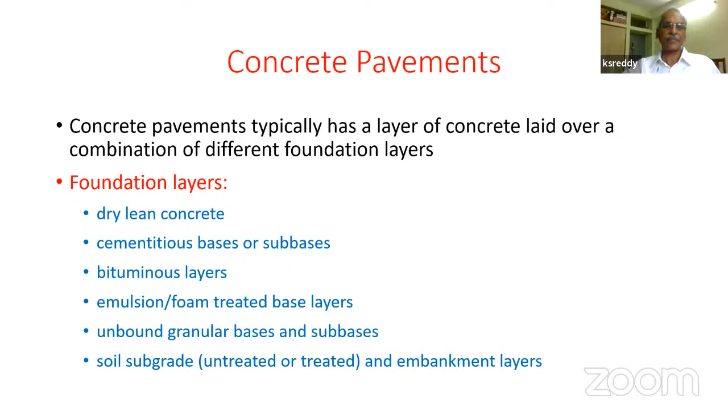You can have various kinds of concrete pavements depending upon how we construct them. This is a continuously reinforced concrete pavement.

I should actually prefer to call it a continuous concrete pavement. There is reinforcement because we are trying to place concrete continuously without joints. So this is theoretically a continuous concrete pavement without joints, though it may have some joints, but by design we don't need to provide them. Since there are no joints, for particular reasons we also provide longitudinal, sometimes transverse reinforcement also. So this is one category of continuously reinforced concrete pavement.

This is a similar pavement, for example roller compacted concrete pavement, where we may not have joints by design. We can place the concrete continuously. Afterwards, you may or may not cut joints.

This is our conventional concrete pavement, jointed plain concrete pavement, which we normally use on our national highways, 4.5 by 3.5 slab, transverse joint spacing at 4.5 meter spacing. Then longitudinal joint, every lane is separated by a longitudinal joint. So typically a slab size is 4.5 by 3.5. You can have pavements with smaller slab sizes, smaller panel sizes. Obviously for that you need to cut the grooves at closer intervals.

This is the smallest size of concrete panel. This is also concrete pavement, you can consider that. If this is concrete and if these are blocks, you can consider this to be concrete pavement.

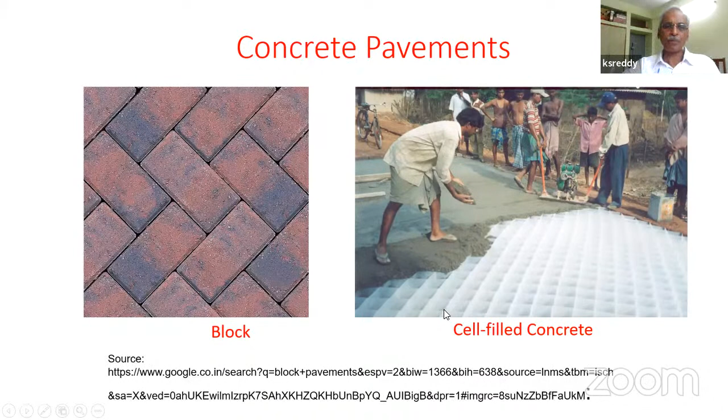So you have different types of concrete pavements, starting from block pavements, precast, cast in situ block pavements, and typical conventional highway concrete pavement, smaller panels, and continuous concrete. You also have what is called white topping, concrete over asphalt layer, bituminous layer, and among white topping, the concrete layer being thin or thick, different kinds of names that we use depending on the thickness of the concrete layer. And you can also have black topping over white topping, bituminous layer over concrete layer.

We also have the total thickness of concrete placed in 2 layers, wet on wet, and then maybe you can use inferior grade of concrete at the bottom layer, and the upper layer could be the functionally required layer with better quality aggregates.

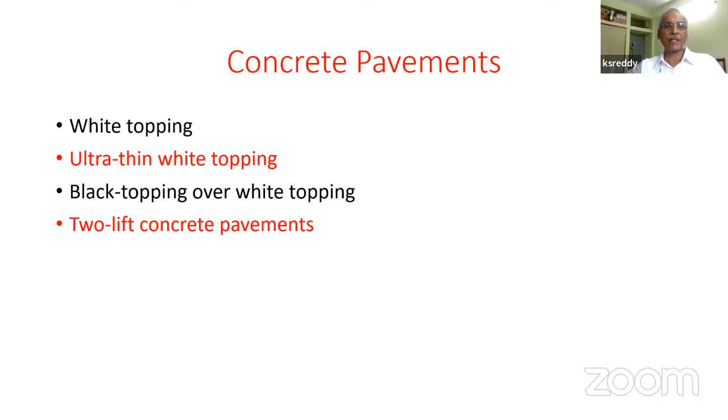So in all this, what defines the kind of concrete pavement is the size of the panel and how we create it. For example, consider this the smallest size of concrete pavement in terms of panel size, which is precast blocks or precast panels. You can prepare them elsewhere and then bring them to the site and then place them and construct a block layer. You can also do the same thing with a panel layer.

So what happens is we also used to have a construction where we construct concrete pavement panel by panel, so there is no interlocking between these adjacent panels. If that were to be the case, for example you've got 3 panels constructed independently, one after another, if you place a load here, then these 2 would not share the load. That same thing is depicted here. There is a middle panel, I'm placing a load here. These 2 panels would not be able to share the load because there is no load transfer mechanism between these 2. This is one kind of concrete pavement.

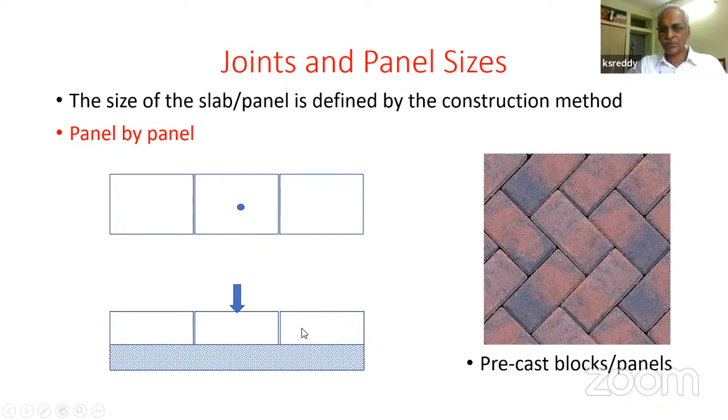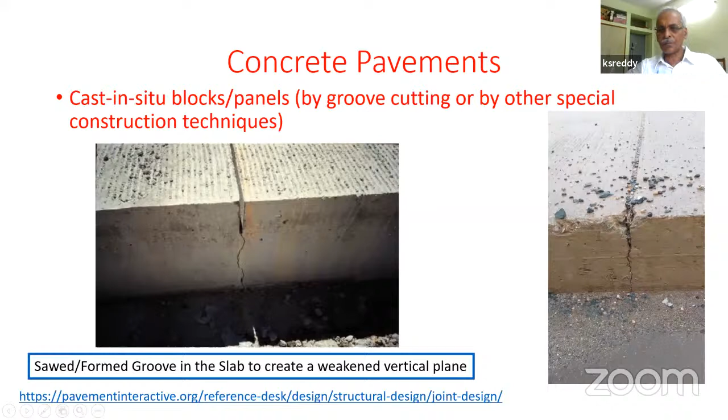On the other hand, we create those joints by pouring concrete and then cutting grooves here. For example, this is a transverse groove that we cut up to 1/3 depth of the slab, and we expect a crack to form below the groove. So once you have a groove, this panel is separated from the adjacent panel. A groove and the crack formation below that ensure that you have a panel of the size you created, maybe 4.5 by 4.5, 4.5 by 3.5, whatever is the joint spacing you consider, transverse and longitudinal. So this is a common form of joint creation that we do on national highways. But let us see the implication of this. And this is also a joint,

a kind of concrete pavement that I just discussed, which is cell-filled concrete pavement. So you've got these plastic shells, we are pouring concrete into that. So this is what we expect: the plastic wall is expected to bend when you pour concrete and roll it or vibrate it. So as it bends, these 2 adjacent blocks are interlocked because of the irregular shape.

If you can see those blocks which are taken out from a cell-filled concrete pavement, you can see the irregular nature of the vertical faces of these blocks. That creates interlocking between adjacent blocks. So this is a cast in situ interlocked concrete block. This is similar to your interlock concrete block pavements, but those are normally precast. This is cast in situ.

So if you place a load on any one of those blocks, you can expect that the blocks around that will share the load. But if this doesn't happen, you do not have a load transfer happening. Each block will be transferring the load to the underlying layer by itself.

So the interlocking mechanism at the joints, the type of joints that we create is very critical in defining what is the size of the panel and over what area there is load transfer occurring.

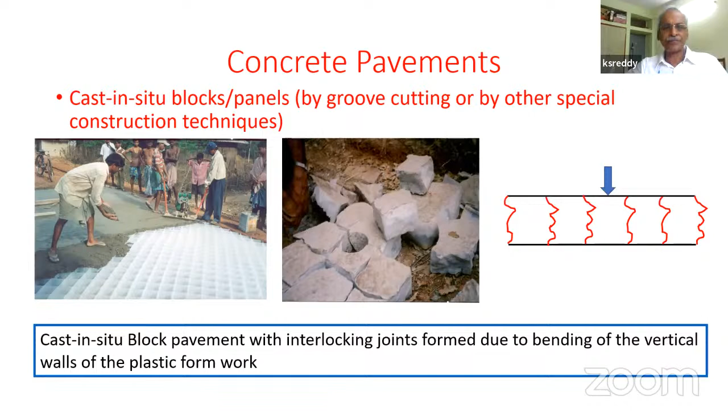For example, if you do not provide any joints and pour concrete over a very wide area, say maybe 5 kilometers together, a very wide pavement slab, what would happen is it would crack. Because as the slab tries to contract due to reduction in temperature in winter, if it is restrained, there will be thermal stresses and it is going to crack.

So if you take an element and increase its temperature by delta T, if you know its elastic modulus value and coefficient of thermal expansion, you know this is the thermal strain, and this multiplied by the modulus value gives the thermal stress. If you're trying to prevent the element from expanding, there is a compressive thermal stress, all of you know that.

Similarly, if it is trying to contract but we do not allow the member to contract, then there is going to be thermal tensile stress. For a simple element, you can calculate the thermal tensile stress as modulus value, coefficient of thermal expansion, into drop in temperature. What is drop in temperature? We'll discuss. So if this exceeds the tensile strength of the material, you can expect a crack, tensile crack.

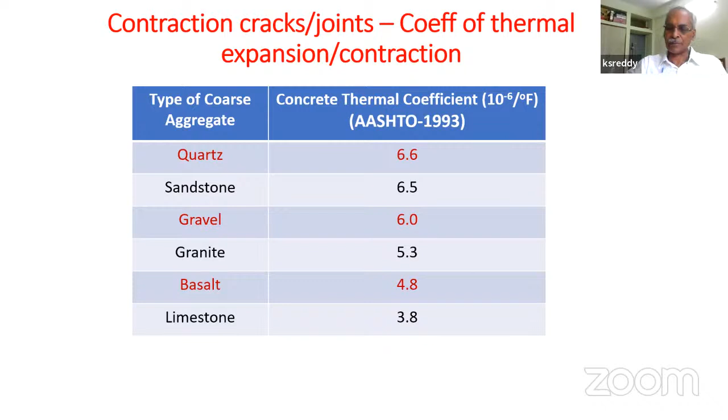The restraint to concrete contraction is mainly produced by the interface between the concrete slab and the foundation, the friction that is mobilized between these two layers under different conditions. I'm presenting some results produced by one of my former PhD students, who is a faculty colleague at IIT Kharagpur, Dr. Swati Maitra. She did experiments on different types of concrete slabs placed on different types of foundations with and without a plastic sheet.

We know that on most of our national highways, below the concrete slab, we put a plastic sheet. We also have construction where we eliminate the plastic sheet and place the concrete directly on dry-lean concrete. So these are the results that we get.

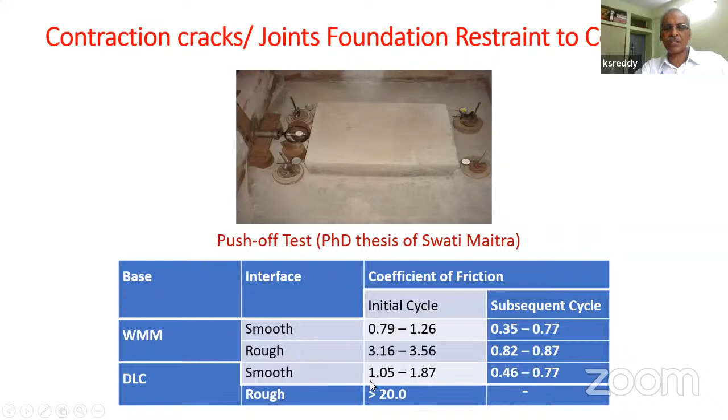And over DLC with a rough interface without a plastic sheet, we could not actually measure it, because the screw jacks were not adequate to push the slab, as the friction was as large as 20.

Now there is a critical issue here. When you cut grooves and expect that a joint is formed, creating a panel of a certain size, this is called joint activation. You cut a groove, typically to 1/4 to 1/3 depth of the slab. You weaken the slab there, and when it tries to contract or shrink, you expect a crack to form there. For example, no crack forms here, no crack formed here, and maybe all these other joints crack.

We have maybe a 4.5 meter long slab here, 4.5, 4.5 -- this is a 9 meter slab. So those of you who had the opportunity to examine failed concrete pavements, if you notice whether a crack has formed below these grooves, you would find in many cases there was no crack below the groove.

That may be because the joint spacing you considered, 4.5 meters, is too small -- because you are putting a plastic sheet there, or the aggregate you're using may have a small coefficient of thermal expansion. So the expected thermal stress, which would crack the slab at 4.5 meter spacing, is not getting mobilized. It can only crack the slab at 9 meter spacing. So if that were the case, what you are actually creating is a 9 meter long slab.

Similarly, if the longitudinal joint doesn't crack, you might actually create a 9 meter by even 7 meter slab, or even wider, maybe 10 meters. So in many cases, what we're doing is creating panels of sizes much larger than what we thought we were creating. What we thought we created was a 3.5 by 4.5 meter slab, but what we're actually creating, because no crack forms below the groove -- meaning activation is not happening -- is larger slab sizes.

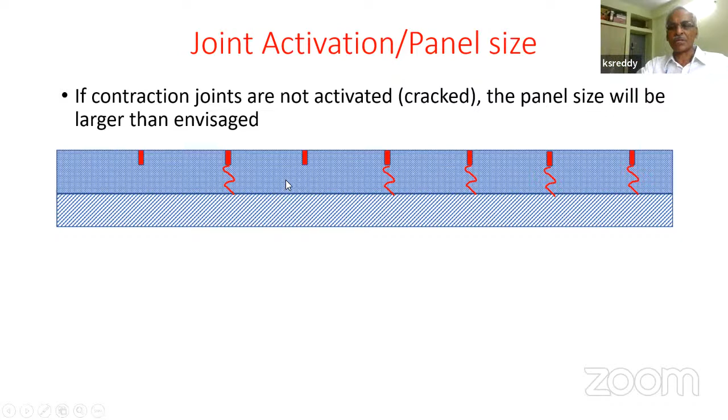That will have an impact on where the cracks will form in the transverse and longitudinal direction, and what is the size of the slab undergoing curling.

Many of you know what curling is. If there is a temperature differential between top and bottom, the slab would either curl this way or curl this way. This would be a typical daytime case, and this would be a typical nighttime case.

But full curling is not permitted because of the self weight. This will pull it down. Similarly, the self weight will pull it down elsewhere. It would not remain completely flat. Some amount of curling will happen in the slab, but not complete curling.

So since there is a restraint to curling, we are not allowing full curling to happen because of the self weight, or because it may be bonded to the layer below. How much resistance the foundation can offer to the lifting of the slab is difficult to estimate. But let us assume, because of self-weight, the slab is trying to be brought back, and full curling is not allowed. So we assume full curling is prevented, and we calculate the curling stress, the corresponding flexural temperature stress.

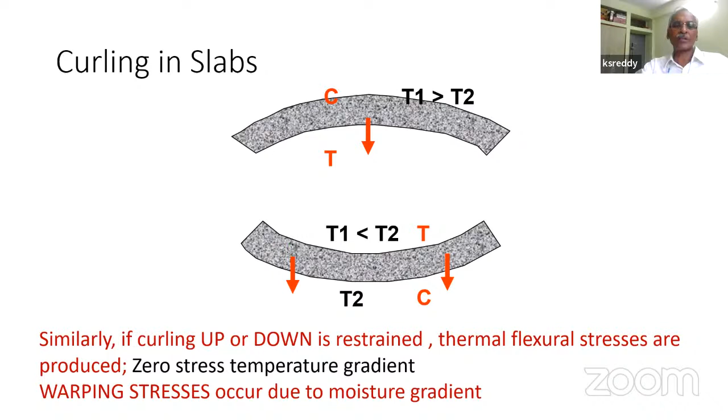A similar phenomenon occurs when there is a moisture gradient. If you have hotter conditions here, you have smaller levels of moisture, and this would have more moisture. So the moisture gradient will be in the opposite direction to the top temperature gradient. One can estimate the stress produced by the moisture gradient the same way as you estimate the temperature curling stress.

See whether the slabs actually curl or not, and how much of the slab curling is actually restrained by the self-weight of the slab. We were making some experiments on National Highway 60, at the Kharagpur Palasur bypass road.

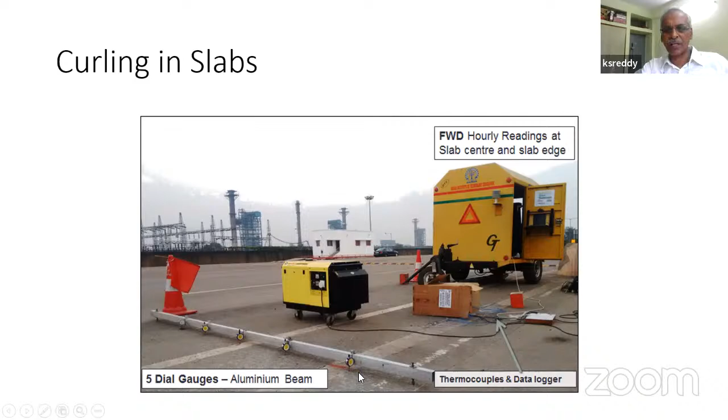We put dial gauges here. We have a frame which was measuring the vertical profile of the slab. We were also trying to measure the temperatures of the slab at different depths to get the temperature profile, the temperature gradient, and simultaneously we were measuring the temperature profile and the lifting up and down of the slab.

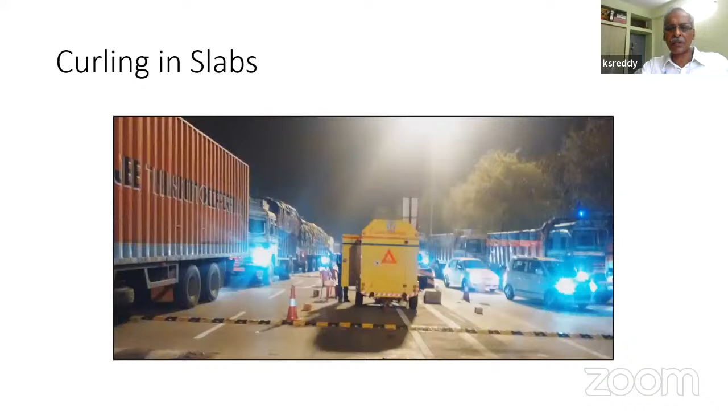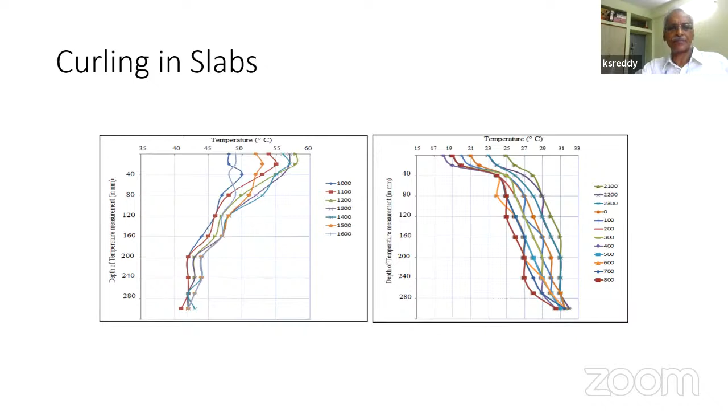So curling happens, but part of this is restrained. This is what happens after the total curling is restrained, partly because of the self-weight and the connections with the adjacent slab and connection to the foundation.

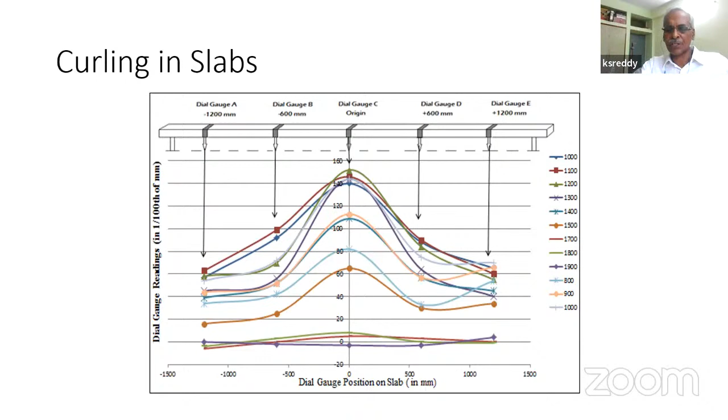So when you compare a large slab to a small block, the block pavement to the continuous concrete pavement, these are the things that are going to be different. The panel size is going to be different. What would be the panel size is a function of how many joints are activated - do you have 4.5 by 3.5 or 9 meter by 7 meter slab? This is a critical issue which will govern where the cracks would form, what stresses will be produced. Typically the thicknesses of large panels will be larger. As you reduce the panel size, you can construct concrete pavements with smaller thicknesses.

Another very critical thing is what is the load transfer mechanism from one panel to the adjacent panel? Because when you place load on a pavement, it should distribute load over a much wider area, whether it is a block pavement or a large panel concrete pavement - we expect the adjacent panel to share load. But we have seen in some construction where you construct the concrete panel layer by panel, there is no load transfer mechanism, whereas when you create an interlocking mechanism, there is definitely a load transfer mechanism. So creation of load transfer mechanism across these panels is very critical for the performance of these pavements.

In some cases there may be no load transfer because the blocks have no physical connection. There could be aggregate interlocking, or we might put dowel bars connecting adjacent blocks or adjacent panels to transfer loads.

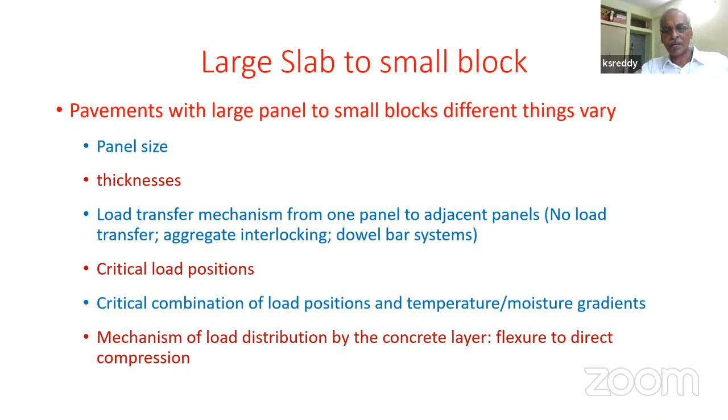Maybe compressive stresses, crushing stress would be more critical there. And in the case of large panels, flexural stress is going to be more critical. So when you consider large panel to small panel concrete pavements, or even continuous concrete pavements, this is the framework within which we are going to examine all these types of concrete pavements.

What is the definition of performance? What are important material characteristics that are relevant if it is a large panel concrete and if it is a small panel concrete or block pavement? Which property of concrete is more relevant? And what are the important loading considerations that we need to take into consideration? And what are climatic considerations? We'll quickly go through this.

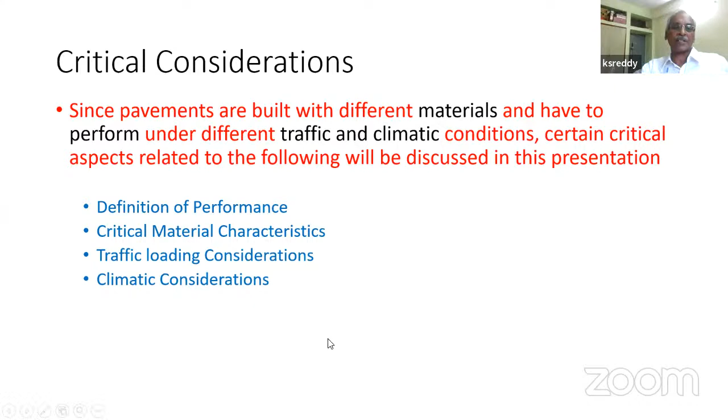We all have studied about functional performance, structural performance, so I'll not go into those details, but we understand for any kind of concrete pavement or any pavement, functional performance is about comfort and then safety, and of course economy. So safety is about having a surface profile which has got adequate skid resistance, friction, so that vehicles can come to a safe stop. On the other hand, comfort is about how the surface profile varies over its length and width.

Okay, so you can quantify that in terms of some roughness index, that is your comfort. So what contributes to roughness or what contributes to comfort, that we need to understand. And skid resistance is primarily an issue related to our construction practice and our material selection. On the other hand, we need to maintain the concrete layer in an adequate structural condition so that it would not adversely affect the functional performance.

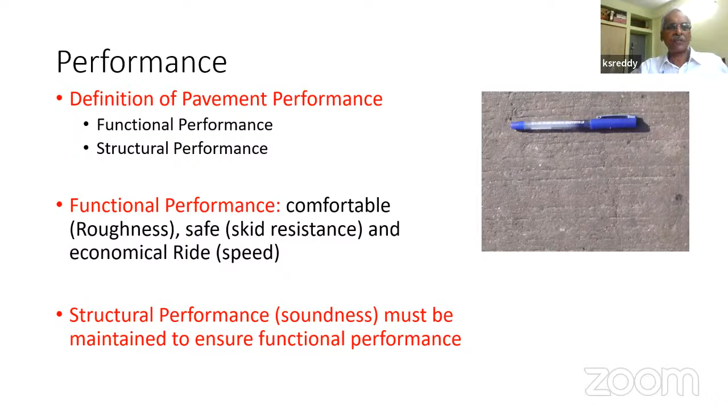We know in terms of roughness or comfort, rougher pavements are less comfortable, and smoother pavements are more comfortable. Smoothness is not about having a very smooth planar surface, it is about less variation in the surface profile. So the variations in the surface profile produce vibrations in the vehicles, produce movements in the body of the passengers or drivers who sit in the vehicle, various kinds of vibrations.

There are certain critical vibrations, accelerations, velocities. One can correlate that to the comfort level and even injury of the people sitting inside the vehicle. So people have been able to correlate the surface profile to comfort level. And you got cracks, you got joints problems, and if there is plastic deformation and so on, they will also contribute to discomfort. This is about what causes comfort, discomfort.

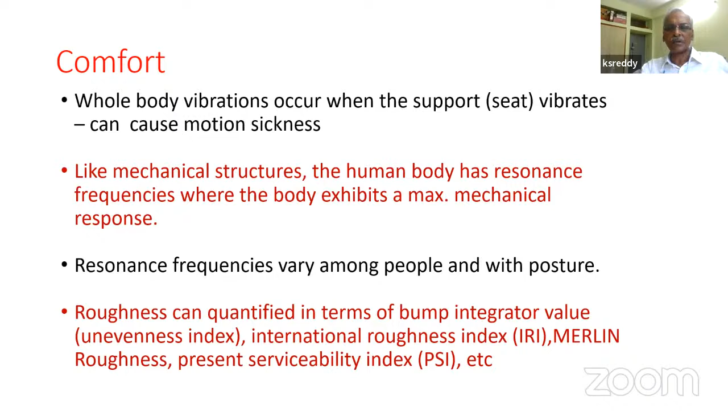And we typically measure roughness or comfort using various kinds of equipment. Fifth wheel bump integrator, or in terms of international roughness index, or we use other equipment such as Merlin machine, or we express that in terms of what is called present serviceability index. There are various ways of expressing the roughness which is related to the comfort.

So every kind of a structure, every facility, you need to expect some performance from that. So you have to define what are we expecting from our roads. Unfortunately, the only performance indicator that we have documented in our documents in India is in terms of the roughness, measured using a fifth wheel bump integrator or by other similar equipment which express roughness of the road.

The current guidelines that we have for concrete pavements given by IRC Special Publication 16/2019 state the roughness, called unevenness index, as measured by fifth wheel bump integrator, should be less than 2000 millimeter per kilometer for good roads, 2000 to 2400 for fair roads, and more than 2400 for poor roads, for expressways, national highways, and state highways category. For other categories of roads, including village roads, good road is less than 2200, fair road 2200 to 2600, and poor road more than 2600 millimeter per kilometer.

But when we design, it would be very difficult for us to control the kind of roughness that we expect during its service life period. There is hardly any design parameter which we can vary or control so that the roughness can be controlled. What we can control is to ensure that it doesn't crack, it doesn't undergo plastic deformation, the foundation is not eroded. These are things that we can control through the design process - increase the thickness, make the foundation stiffer, maybe control the size of the slab. These are our design variables.

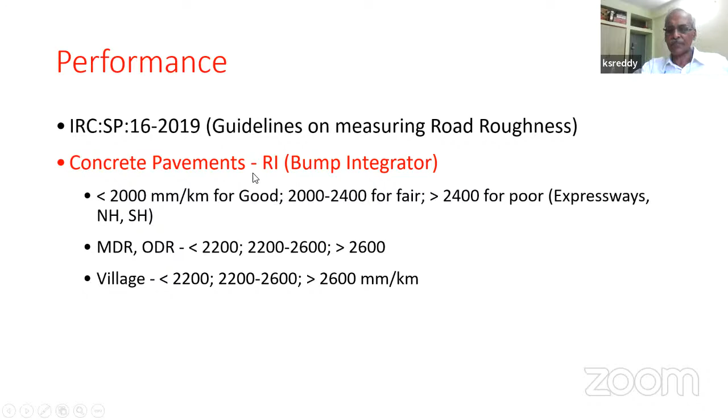So thereby we can control the stresses, deflections, in the layers of the pavement. But can we control the roughness of the road surface, how the profile is going to vary directly through our design process? Very difficult. But our guidelines for performance indication in India are currently in terms of the roughness or unevenness index value.

Compared to this, if you look at the mechanistic empirical pavement design guide for jointed pavements as well as continuously reinforced concrete pavement, let us look at jointed pavement because this is what we normally build in India.

There is a joint faulting, which is a problem with concrete pavements. At the joint, both slabs are at different elevations. So the average joint faulting should not be greater than a certain value. For interstate highways, there is a criteria for that. As for load transfer efficiency, theoretically there is no criteria, but we expect a certain level of load transfer efficiency.

The amount of transverse cracking, the percentage of slabs having a certain degree of transverse cracking, should not be in excess of 10%. This is a performance indication in terms of physical problems you see there. There is a performance indicator in terms of joint spalling, and also one in terms of roughness. If you can estimate all these, they go as input parameters for estimation of roughness, so you can control the roughness directly in terms of these parameters.

Similarly, if it is continuously reinforced concrete, you have got similar parameters. What I'm trying to say is the mechanistic empirical pavement design guide, MEPDG, talks in terms of cracks, foundation erosion, the spalling that occurs near the joints, and the joint faulting that occurs near the joint. It talks in terms of those physical problems which you can see, measure and quantify, and it sets limits on those.

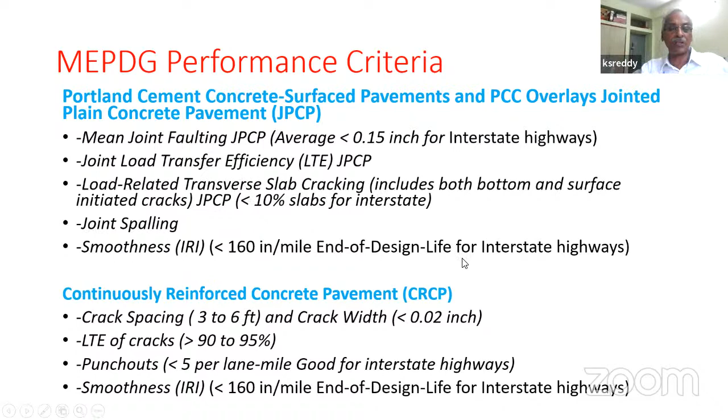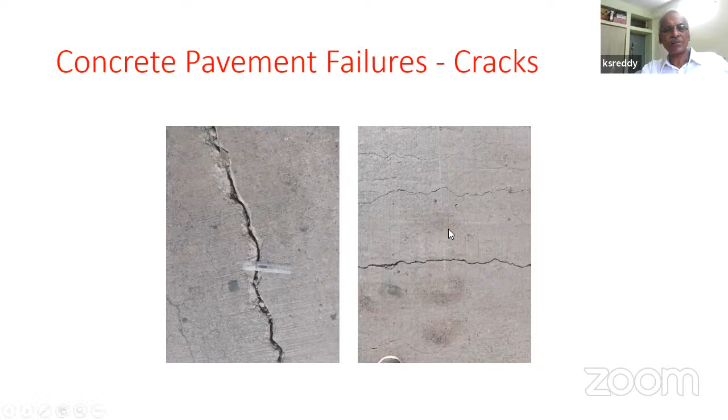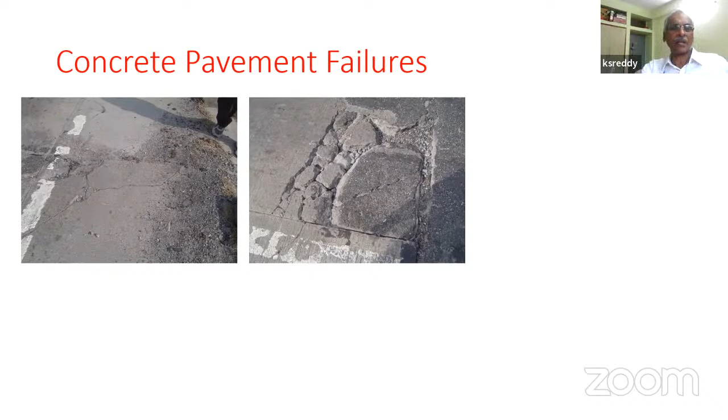Both slabs are at different elevation. So there are various types of cracks that form because of various reasons. And once you have cracks, you have other disintegration of the slab occurring near the corner locations and mostly near the joint locations, and at edges of cracks, you have slab disintegration happening.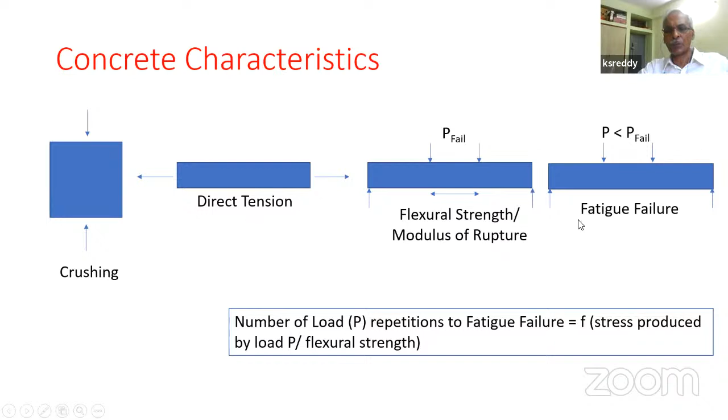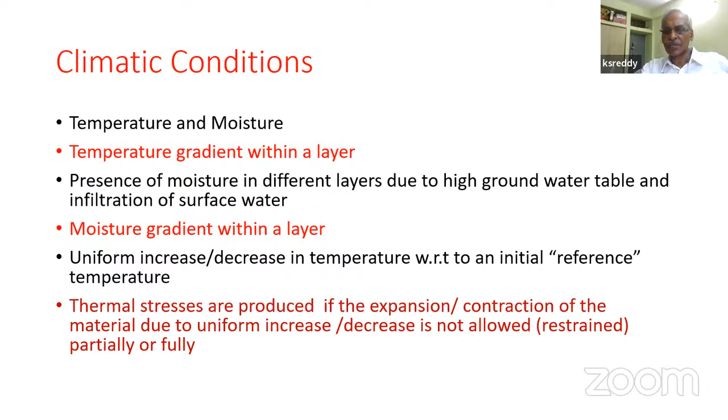When you consider climatic conditions, these are different issues: variation in temperature, temperature gradients, and then the maximum temperature, minimum temperature to which the layer is going to be subjected, the temperature when the slab initially is set and then gains strength. Was there any temperature gradient when the initial setting happened? These are the issues that we need to consider in our design.

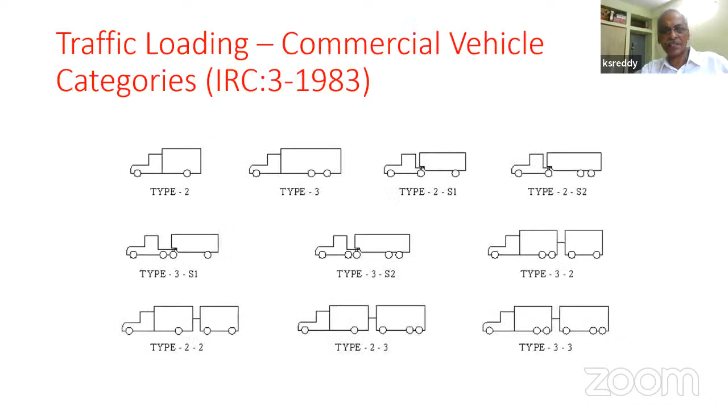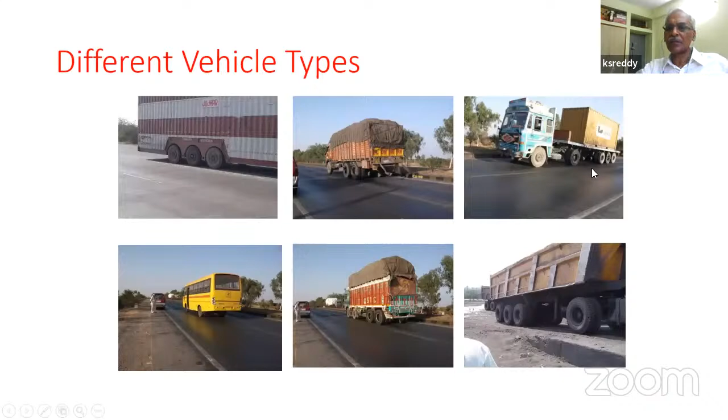We have various kinds of loading - the concrete pavement is subject to different kinds of vehicles as defined by IRC 3, 1983. Various kinds of axles - tridem axles, single axle, dual wheel, single wheel, all axle configurations are there. These are different axle configurations for which these are the legal loads prescribed by the Ministry of Road Transport Circular: single axle single wheel, single axle 2 wheels, tridem axle 12 wheels, and so on. This is the maximum permissible limit.

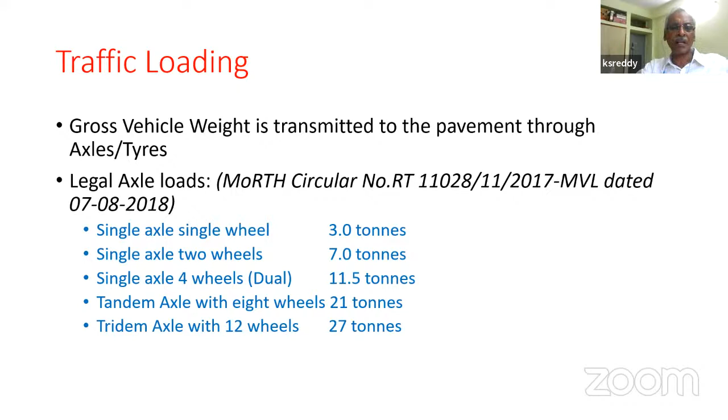What I'm more interested in, rather than the legally permissible load limit, is the axle configuration. This is the wheel load configuration for a single axle, single wheel on either end, and then single axle with dual wheel at either end, tandem, tridem with 2 wheels on each axle. These are tandem and tridem with a single wheel at either end. You might have seen axles of this configuration also.

So when you consider different panel sizes - whether we should put one axle or two axles - only one set of dual wheels is going to be critical. This is what I was discussing when the slab size varies from a very large panel to a small panel block. So the number of wheels that you can accommodate and the kind of failure it would produce - transverse cracking, longitudinal cracking, top-down cracking, bottom-up cracking - the load positions are going to be critical.

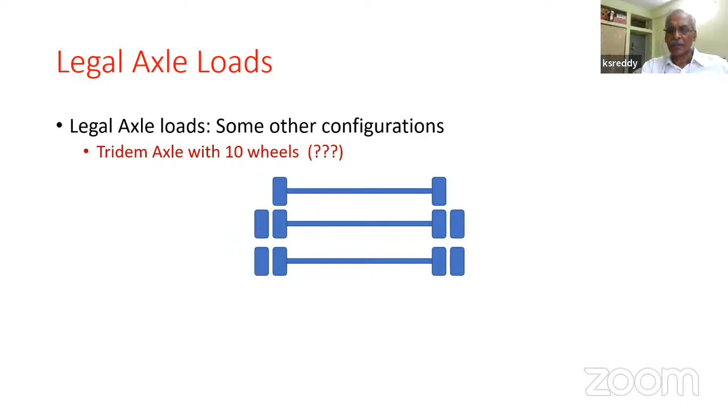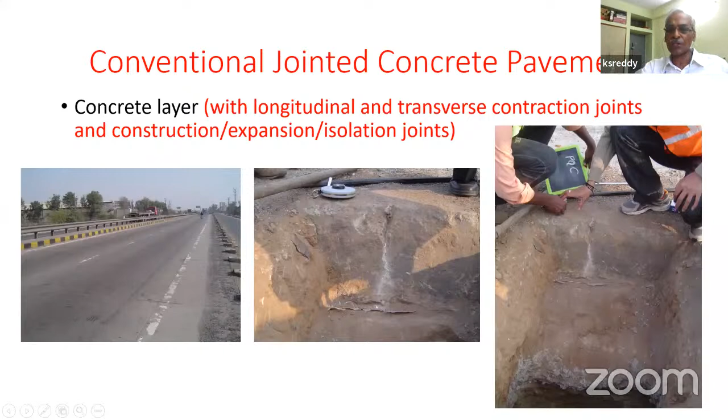As per Indian Roads Congress guidelines, I'm quickly going to discuss 3 different kinds of pavements. The conventional jointed concrete pavement as per IRC 58 - I'll summarize the design features, not going into too many details. We typically go for 4.5 meter transverse joint spacing, and every lane we try to separate with a longitudinal joint - so 3.5 meter longitudinal spacing, 4.5 meter transverse joint spacing.

So typically we are creating 4.5 by 3.5 meter panel sizes, assuming there is activation of the joint at every groove that you cut. We have dry lean concrete plus granular layers as the foundation layers placed over the prepared subgrade. And we check the slab for cracks that initiate from the bottom, and top-down cracks, bottom-up cracks. In the transverse direction - the longitudinal direction occurrence possibility is less severe than transverse cracking. The combination of loads that can produce bottom-up cracking with positive temperature differential, similar to the combination of loads and temperature differential that produce top-down cracking, have been identified in IRC 58.

The number of loads that can be combined with maximum positive temperature differential, and the number of loads that can be combined with maximum negative temperature differential, have also been identified. We calculate the total cumulative fatigue damage caused by all those traffic loads during the design period of 25-30 years, and then assume that if the total damage doesn't exceed 100% or 1, the slab is going to be okay.

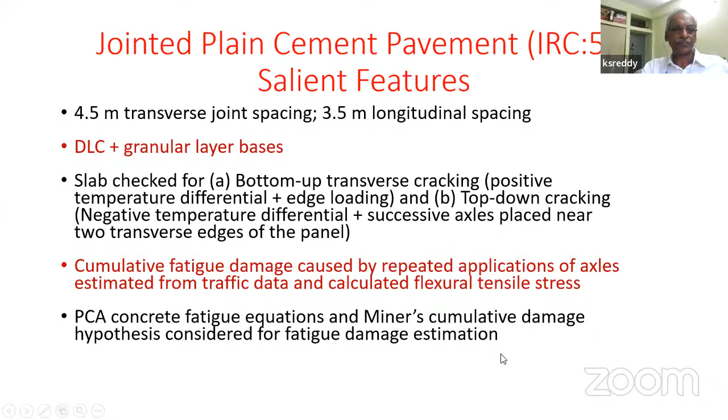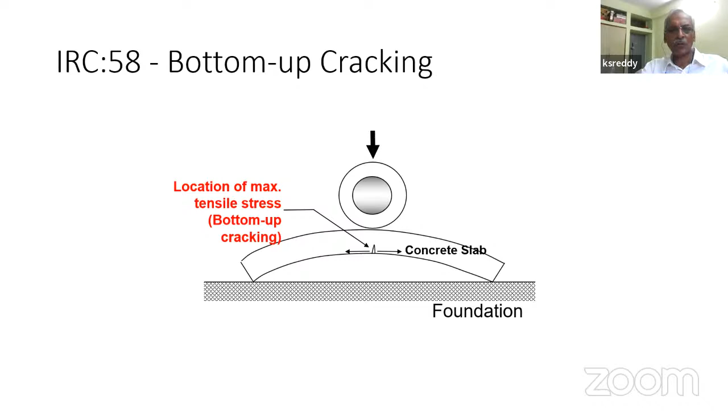So these are the two types of problems that we consider. Daytime, when the slab is trying to curve like this, and when you place a load like this, it can produce a bottom-up crack, which will progress upwards, called bottom-up cracking. Find out how many loads are relevant for producing this kind of failure. During daytime, how many axles would be placed in the middle of the slab, count them, and find out the cumulative damage caused by all that number.

Typically, if it is a transverse cracking case, single axle you place in the middle, tandem axle, this would be the load position. You subject this to positive temperature gradient so that it will have the tendency of curling as shown here, and the combined action of load plus temperature differential would produce bottom crack.

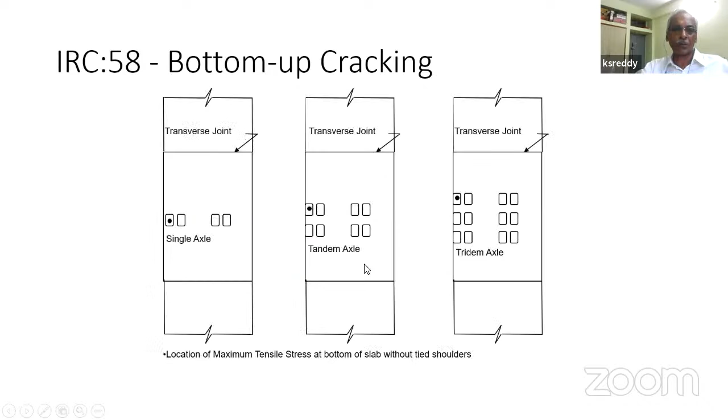Similarly, during night time, there would be certain category of vehicles which would have spacing between the front axles less than the length of the slab, which is the transverse joint spacing. So you count those number of vehicles, and those would be in combination with negative temperature gradient, during which the slab will have this tendency, producing a top-down crack here.

So count all those numbers plus the negative temperature gradient, calculate the fatigue damage caused by all those vehicles whose spacing between successive vehicles is less than the transverse joint spacing, and then estimate the cumulative damage. That is relevant for top-down cracking.

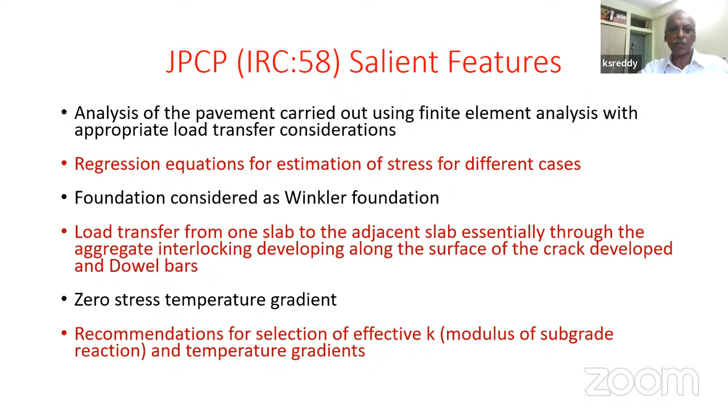So these are the salient features. The analysis is carried out using finite element analysis. Foundation is considered as Winkler foundation, bed of springs, and there are concepts called zero stress temperature gradient, load transfer from one slab to another slab, and load transfer from main slab to a paved shoulder. These are the salient features of jointed concrete pavement as per IRC 58.

I'll quickly introduce a new type of concrete pavement. I think I'll just take another 10 minutes for this talk.

As I already shown you, this is a continuous concrete pavement where we place concrete continuously. We may have some joint somewhere. If it is a construction joint, of course, you need to have a joint there. Sometimes we may have an isolation joint or expansion joint. But let us assume theoretically we place concrete continuously. As a result, we may have cracks forming there, and you may place reinforcement like this in the longitudinal direction.

So these are the cracks in the side view that you see at irregular spacing, but more or less at regular spacing you can see them. Sometimes they could be random also. So you have cracks, and there is a reinforcement running through this. Hence, it is a continuously reinforced concrete pavement.

So how are these different from your jointed concrete pavement? You should assume that this is your panel, which is created. This is separated from the adjacent panel like this because there is a full depth crack. So when you place a load on this, it should transfer load to the adjacent slab. That is the meaning of a layer. Otherwise, each block is working independently, so there has to be some load transfer mechanism across this.

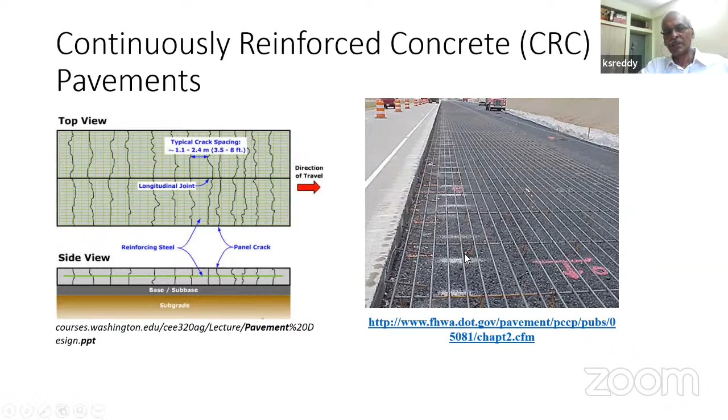As you can see, these cracks are irregular in shape, so there is an interlocking that is happening between these two. The function of reinforcement is to ensure that the cracks do not open up. The interlocking is maintained, so the reinforcement is designed in such a way that the crack spacing is controlled, crack opening is controlled, cracks do not open up too wide during winter. So that is the purpose of reinforcement here.

Yeah, same thing is explained. This is the plan view, this is side view. In the plan view, if you do not have any joints, you can expect cracks to be forming at some regular irregular intervals. If the slab is too wide, you can also expect longitudinal cracks to be forming.

So these, if these cracks are full width, this is one panel, this is another panel, you can consider this to be a different panel. So the load transfer from one panel to another one, as I just explained, will happen through this interlocking. This slab is interlocked with the adjacent slab through this interlocking mechanism. We do not want this to be opening up too wide, otherwise the interlocking mechanism will get reduced, and load transfer to the adjacent slab is going to be reduced.

The purpose of reinforcement, as I just mentioned, is to keep these slabs, the cracks tight together. They will not allow them to open up too wide, and maintain the interlocking adequately throughout the service life period.

The principle of continuously reinforced concrete is that we know there is going to be cracking, so it is based on letting it crack. People should accept that this is a pavement which is going to have cracks. When you cut grooves, they're in a regular fashion, so people accept that, but this surface will have irregular cracks, so one has to accept that.

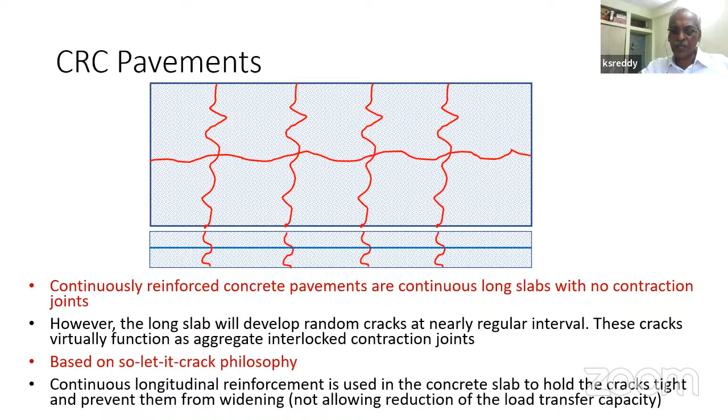We provide continuous reinforcement to ensure that adequate load transfer is continuously maintained, so the cracks do not open. What is the design philosophy here? We have reinforcement, you've got the slab, and you expect cracks to form, and they may be of different width and different spacing.

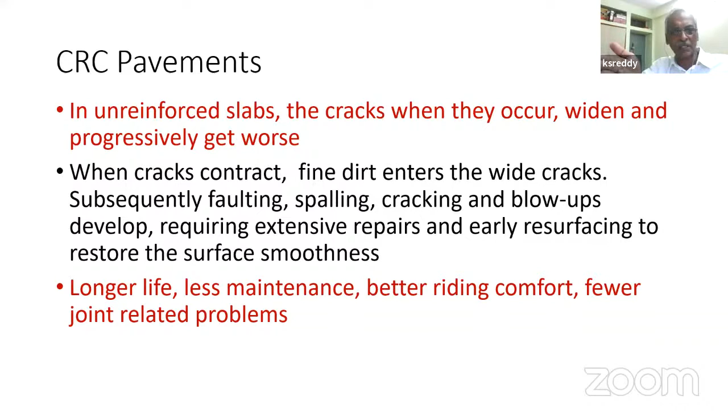So what we design these slabs to ensure is that the slab spacing is controlled and slab width is controlled. The joint spacing, the crack spacing is controlled, and the crack opening is controlled. We don't want it opening up too large. We don't want the crack spacing to be too small or too large - both cases you will have a problem. Let me show you what it is.

This is the typical type of failure that would happen in a continuously reinforced concrete pavement, because these transverse cracks, if they are too close to each other, the maximum tensile stress would generally be produced at a location about 1.5 to 1.8 meters from the edge of the slab. So this piece breaks out, which is called a punch out. When you talk about continuously reinforced concrete pavement, how many punch outs you see per mile or per kilometer is the failure criteria.

So we're going to control these kinds of failures because we are going to have narrow slabs, and when you place loads, this piece is going to break out, which is called a punch out. We're trying to control the number of punch out failures in a continuously reinforced concrete pavement. So our selection of reinforcement, thickness, grade of concrete, foundation - all this is to control how many punch outs are going to be there, and how much spalling, and so on.

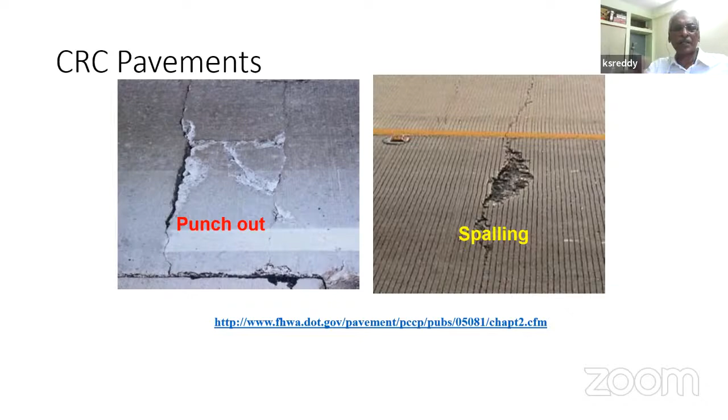There are three major design processes available: the American Association of State Highway and Transportation Officials 1993 design guideline, and the more recent Mechanistic Empirical Pavement Design Guideline. We also have Indian Roads Congress 101, 1988, for continuously reinforced concrete pavement with elastic joints.

These are typical design criteria adopted either in MEPDG or AASHTO 1993: the maximum allowable design crack width - the crack should not open beyond 0.5 millimeter. So your design should be done in such a way that the crack width should never be greater than 0.5 millimeter. It's very difficult to control, but they try and provide design equations and analysis for that.

This is so that there is no spalling happening. You don't want any hard material to go into these cracks and break the edges of the joints. You don't want water to penetrate through these cracks. So keep the joint opening to a maximum of 0.5 millimeter.

The desirable crack spacing should not be smaller than 1.1 meter, which is 3.5 to 8 feet. If it is smaller than this, your punch out problem is going to be more, because you've got a very narrow slab and there is more potential for punch out cracking.

If it is too large, very long slabs will contract more, and the crack is going to be opening more. So you have more problem of joint spalling - breaking of the crack edges is going to be more if you've got long slabs. So you don't want your crack spacing to be greater than 8 feet, and you don't want it to be smaller than 3.5 feet. There is a way of controlling that during the design process.

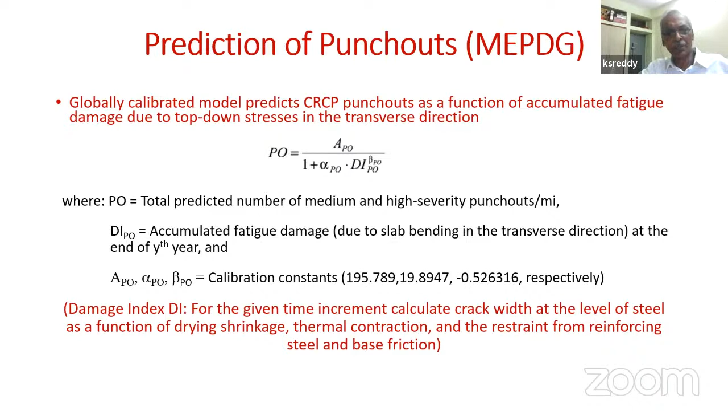They have developed correlations comparing the physical punch out numbers observed to the theoretically calculated damage index. This is what we do in IRC also for estimating the fatigue life, so that we can estimate the damage index as a function of the stress produced by a given load and the flexural strength, which is called the stress ratio - this is what we do in IRC 58 also.

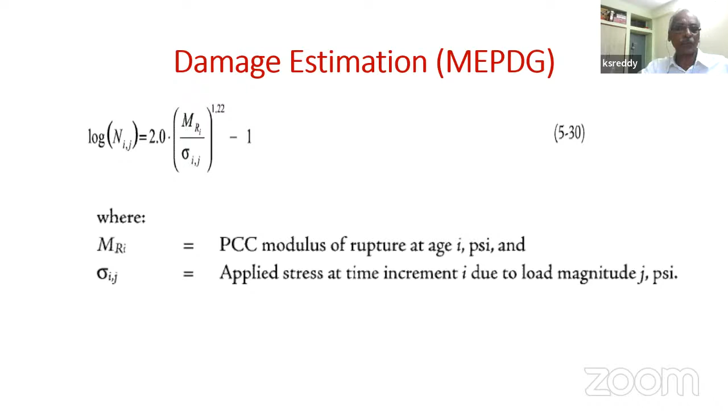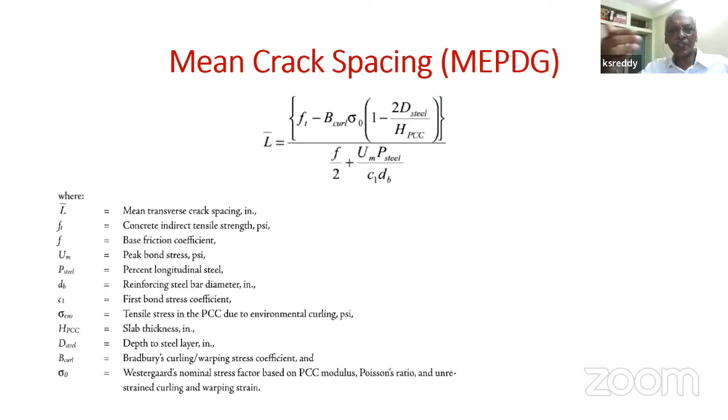This is an estimation of what is going to be average crack spacing for a continuously reinforced concrete pavement with a given thickness, grade of concrete, and reinforcement. You can estimate that if you have all these inputs available. You can also estimate the crack width, again if you have all the inputs available, including temperature drop, coefficient of thermal expansion, and so on. These are the parameters we're trying to control: crack width and crack spacing.

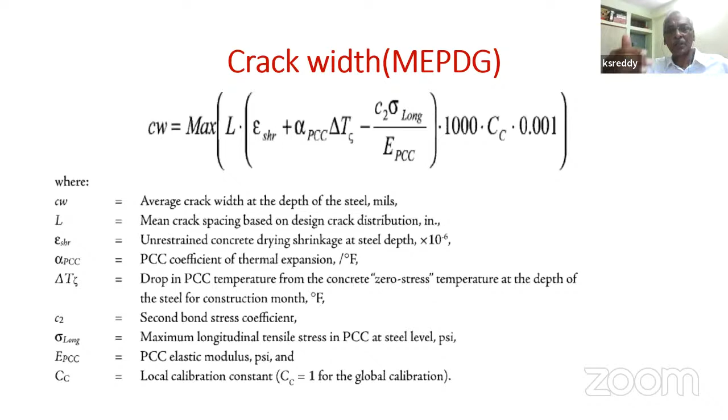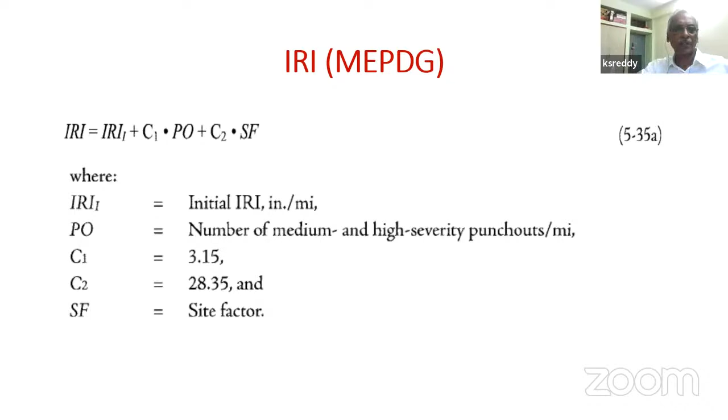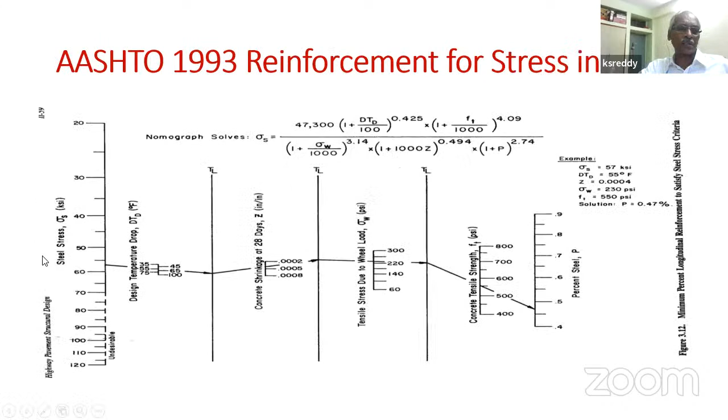Similarly, you can estimate crack width. You can estimate the steel stress so that the steel doesn't get ruptured.

I'll take another five minutes to share some details related to short panel concrete pavement. Afterwards, if you have any questions related to any part of this, you can ask me. This was a research scheme carried out for the National Highway Authority of India, and this is a PPT that was prepared by my PhD student.

Suppose you want to reduce the thickness of the concrete slab. Large panels will be subjected to more flexural stresses, more curling stresses, so you won't be able to reduce the thickness significantly. Typically, thicknesses are of the order of 330 millimeter, 270 millimeter, or 250 millimeter.

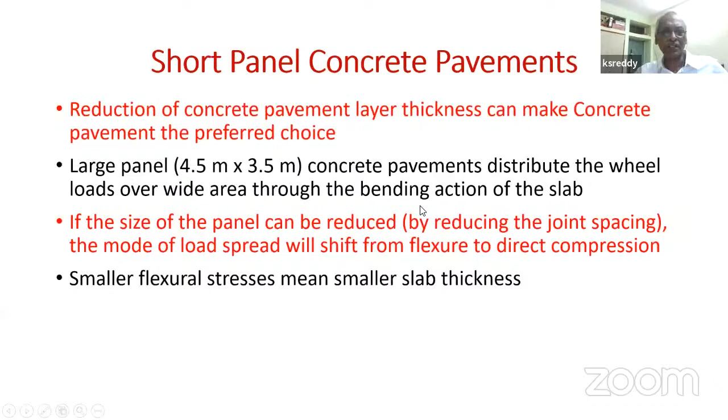But if you reduce the size of the panel to 1 meter by 1 meter, or 1.5 by 1.5 meter, you are reducing flexural stresses, and converting more to direct compressive stresses on the foundation layers. So it would be possible to reduce the thickness of the slab. Large panels distribute the load over a much wider area, but mostly by bending and flexure. As you reduce the slab size, it would be less flexure, more direct load transfer.

This is a Bangalore Nice Road panel concrete pavement, short panel. It's basically constructed the same way as a normal concrete pavement, but you cut grooves both longitudinally and transversely at much closer spacing. If the cracks develop below these grooves, meaning they get activated, you get panels of this size, provided the joints activate, that is, a crack forms below every groove that you cut.

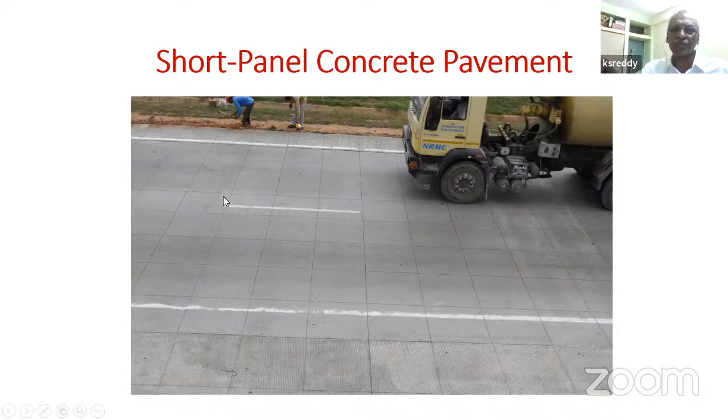So this is the individual panel size, and they are interlocked with the adjacent blocks. If you place a load somewhere, all these blocks will share the load because of the interlocking among them. Typical panel sizes range from 1 meter by 1 meter to 2.5 meter by 2.5 meter. As already mentioned, there's smaller magnitude of bending stresses and smaller curling stresses. The main issue is you have more joints to construct and maintain.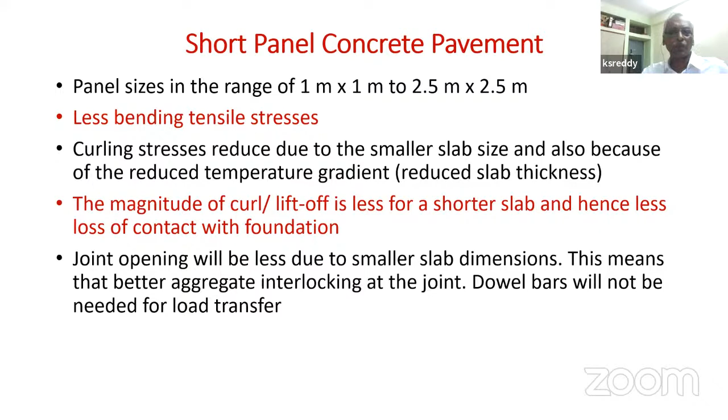But since the joint width is smaller, the roughness or comfort level is expected to be better compared to more conventional concrete pavement, where the joints open up much wider.

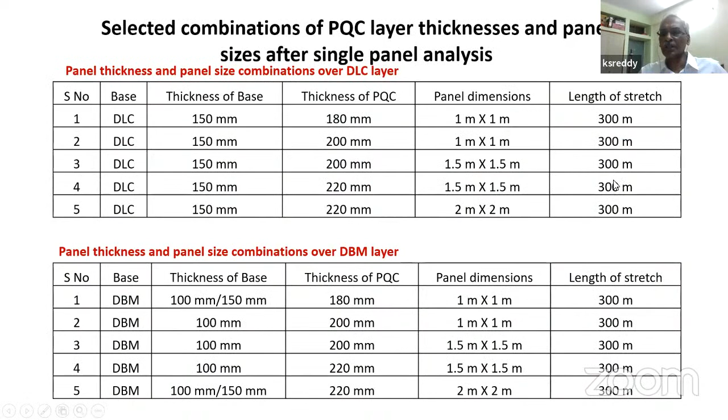I'm sharing a few details about a test section we constructed on a National Highway for a National Highway research project. These are different combinations of different panel sizes and different base thickness layers. The base was dry lean concrete. We also constructed this panel concrete on a dense bituminous macadam layer, which is typical white topping construction. These are the thicknesses of different sections.

The construction is done the normal way. The only difference is that you have to cut the grooves at closer spacing, so you have to plan for that because there's a specific time window available for groove cutting, and you have to cure them properly.

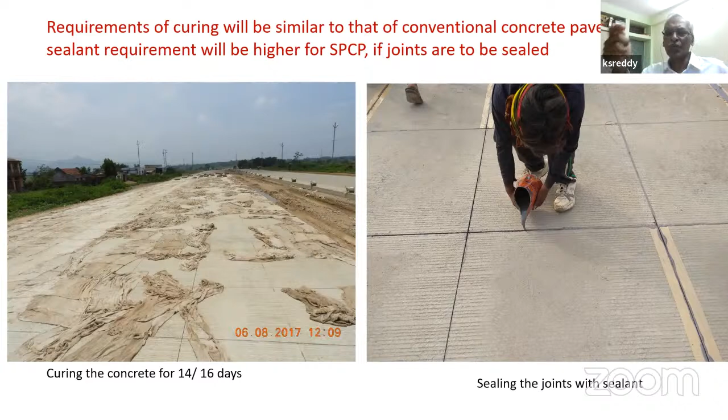We were also trying to see whether sealing is required or not. We didn't find any effectiveness in sealing the joints, because with the slab being small, the joints don't open up wide enough. So the sealing is not that effective here.

This is a national highway that we constructed and inspected in 2017. So this is almost a 5-year-old concrete pavement on a national highway. We have carried out various kinds of structural evaluation of these pavements to understand what kind of load transfer takes place from one panel to another, what is the level of load transfer efficiency, and what are the critical load positions for different panel sizes.

For example, if you have a 2 meter by 2 meter panel size with a dual tandem axle, the front axle placed close to this edge and rear axle placed close to the edge could be a critical load combination for producing a transverse crack in this direction. Similarly, as the panel size varies from 1 meter by 1 meter to 2 meter by 2 meter, there could be several combinations of load position.

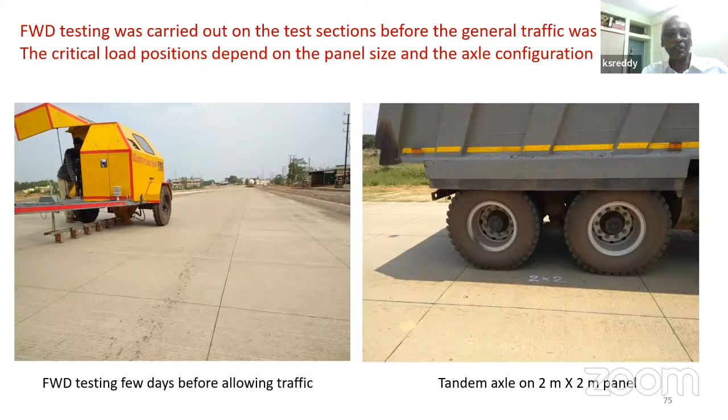Just the dual wheel itself could be a problem. Tandem axles could be a critical position. So we identified several critical positions which can produce longitudinal cracking as well as transverse cracking.

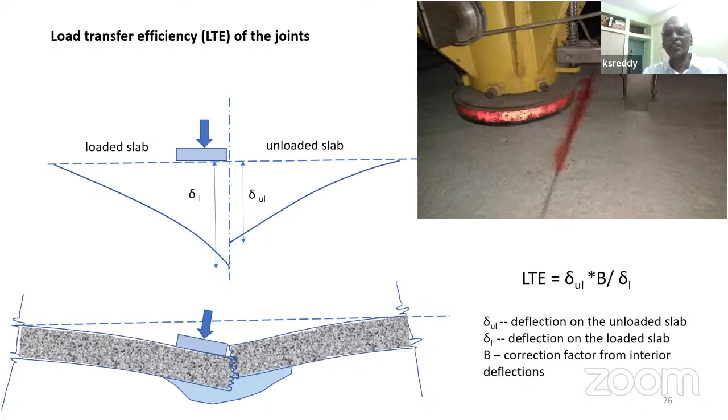We have been measuring the degree of load transfer that can be produced. It is typically high, of the order of 85 to 90%. But when we produce design charts, we typically assumed it to be of a lower order, let me show you that. This is how these panel concrete sections, whichever have failed, show corner cracks and then diagonal cracks.

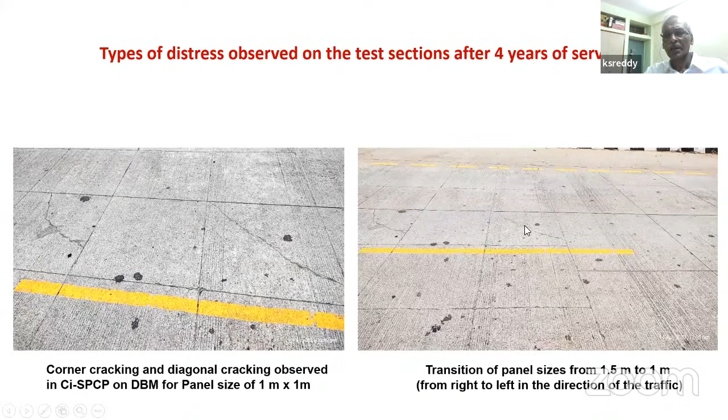But most of the failures have happened because of foundation failures. Let me show you this. For example, this row of panels failed. Once one panel failed, the adjacent panel started failing. This was because of the foundation that we had here.

There was water accumulation and erosion of the dry lean concrete foundation. Though dry lean concrete is supposed to be a non-erodible foundation, when there is water accumulation and continuous pumping of these panels by heavy loads, there is going to be erosion of all kinds of foundation. So this is one major type of failure that we observed.

We didn't see this on white topping failure pavements, where we place the panel concrete on a dense bituminous macadam layer.

So this was the analysis of a panel concrete pavement, where we considered different sizes, different load positions, positive temperature gradient, negative temperature gradient - almost 30 to 40 different combinations of critical load position and temperature gradient were examined, both for longitudinal cracking and transverse cracking, top-down as well as bottom-up.

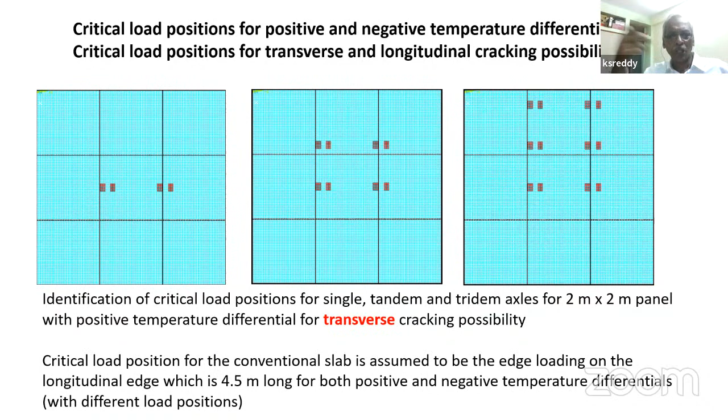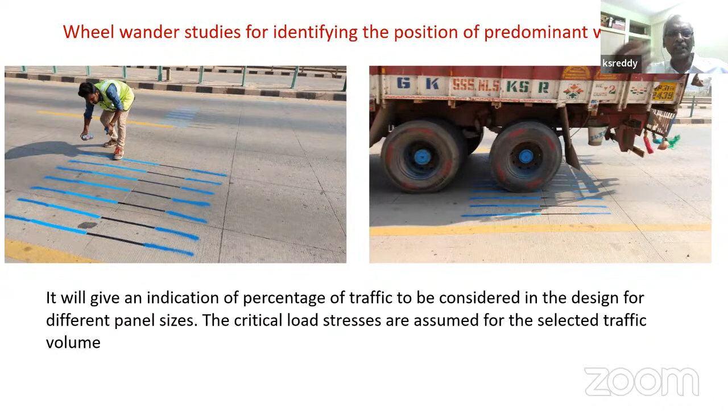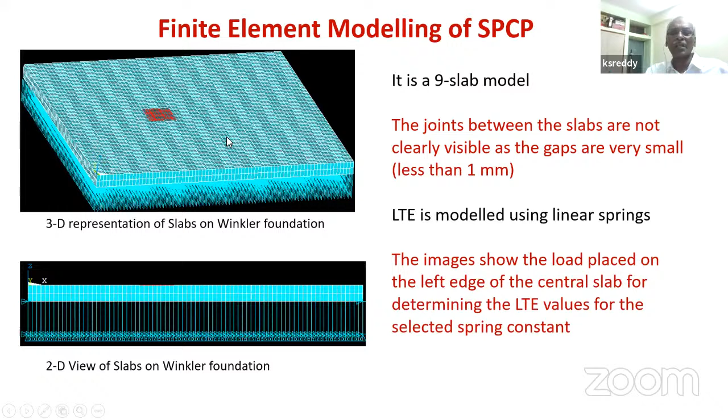Finite element analysis was carried out using a multi-slab, 9-slab system, with the slab placed on linear springs, and also slab placed on a multi-layer elastic layer system. Various panel sizes were analyzed.

For conservative design, a load transfer efficiency of 50% was taken. We're trying to produce design charts and stress analysis charts for varying load transfer efficiency. Typically, we will get much greater load transfer efficiency from one panel to another - of the order of 70 to 80% throughout the service life period.

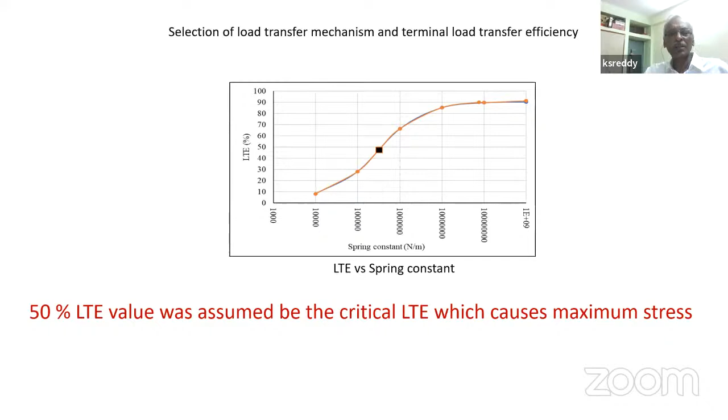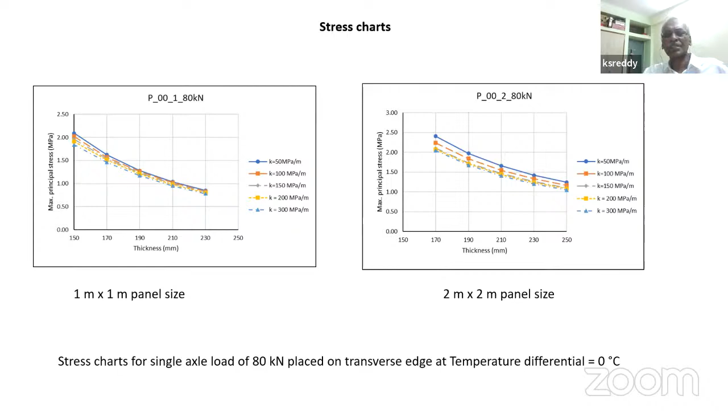But assuming there is going to be disintegration of these joints and the load transfer efficiency gets reduced, there will be more load transfer to the bending stresses as well as more stress on the foundation. These are typical combinations that we consider. We have produced a lot of stress charts similar to the stress charts that IRC 58 used to have, produced in terms of regression equations.

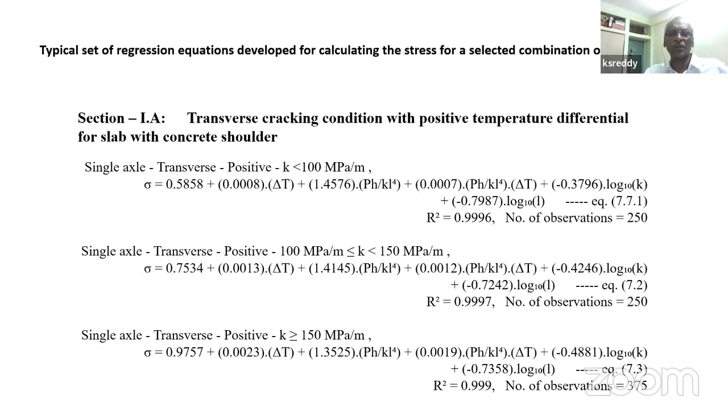I think almost around 150 critical cases are there, so 150 regression equations have been produced. This is the design methodology for panel concrete pavement.

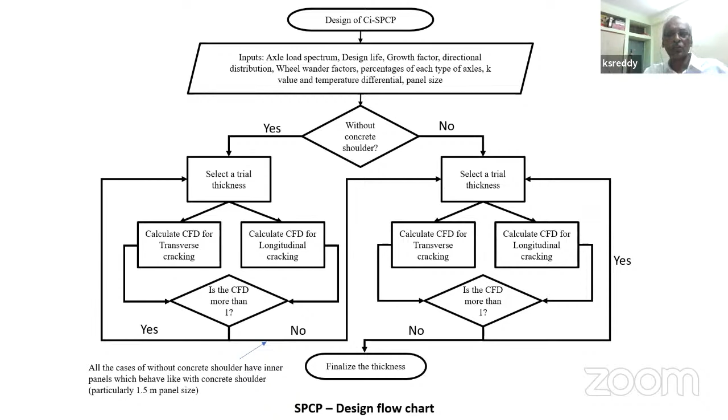There is no design analysis procedure currently available for analysis of panel concrete pavement. We are currently using the analysis available for white topping and ultra thin white topping. So we believe these are going to be useful for design of panel concrete pavements for high volume roads.

I think that is about the panel concrete pavement. I don't know whether I was able to summarize the entire thing that I wanted to discuss, but I would be happy if you can ask me some questions related to any aspect, whether it is design or evaluation, of any concrete pavement. Thank you.